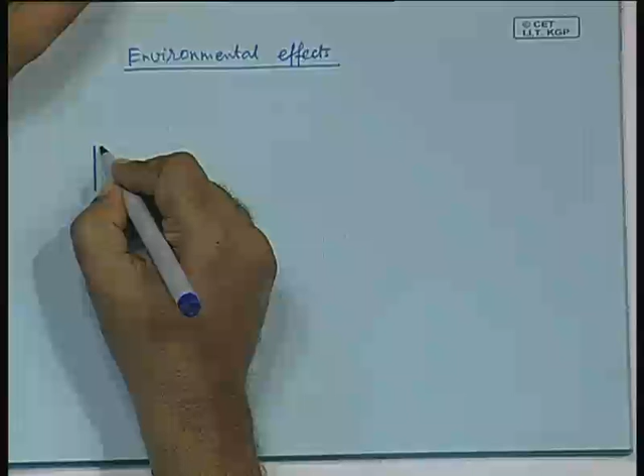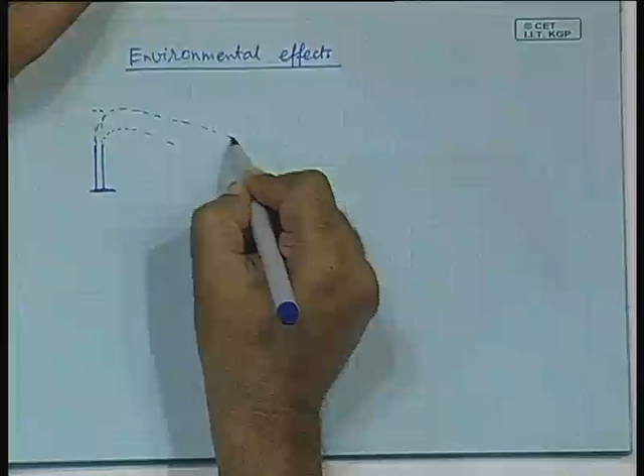So in this case you have some height of the chimney, and above that it rises to some other height. You assume it rises to this height, or it actually goes like this - this is the stack, and if you join these lines, it reaches a point somewhere here. So you can assume the flue gas rose to this height and then was dispersed. Even though these lines are not really straight, it is not unreasonable to assume that.

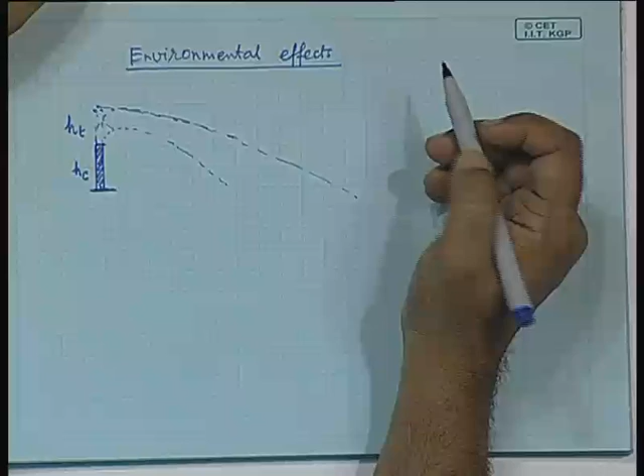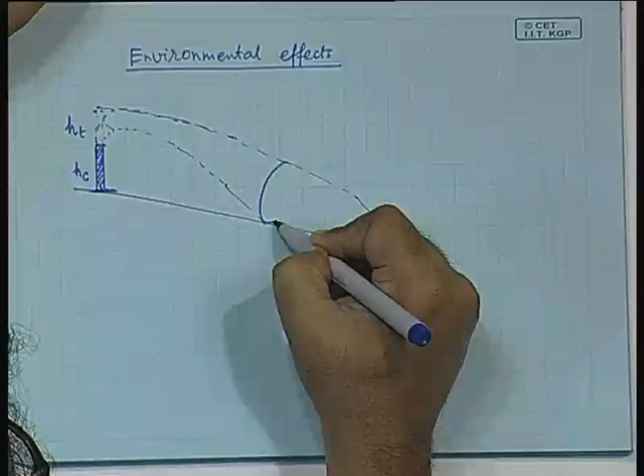Suppose this height is HC, the height of the column, and let this height be HT - the height to which the plume rises. Suppose this is the ground; it touches the ground at some level, and at this point you can assume a circular cross section, where it has touched the ground level and is expanding.

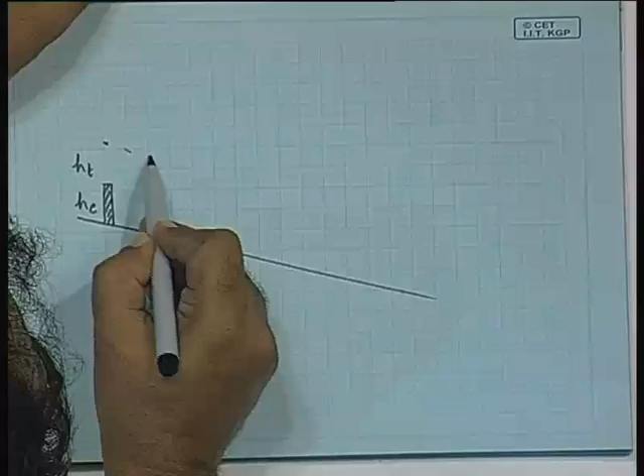Let me draw it separately so the drawing is correct. Suppose this is the ground line, this is the height of the chimney, and this is the height to which it rises - this is HC and this is HT. At some distance it touches the ground, and at that level you can draw a line and assume it to be a circular cross section of this radius.

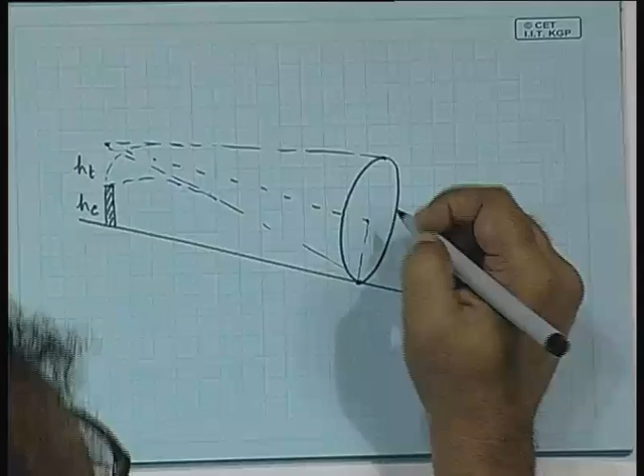So this height is how it is expanding - it is actually going like this, but you extend those lines. So the total height h is HT plus HC, and this radius is also h.

Now the question is, after how much distance will it touch the ground? In general, it has been found that this is of the order of 15h. So things are expressed in terms of h.

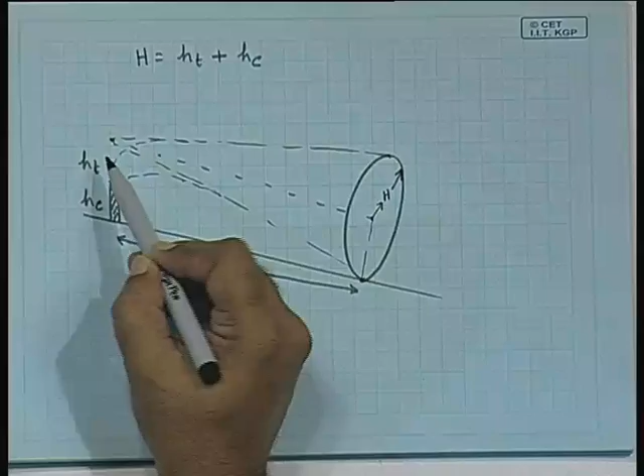You might ask how much should be HT, because if everything is calculated on the basis of the total height, you need to know how much it will rise. That obviously depends on the energy content in the flue gas and all that. So let us see what they are.

So what you have seen: HT is the thermal plume rise, and HC is the stack height.

These issues we will be dealing with are very important. You may have noticed, if you go to Calcutta, there is a Kolaghat thermal power plant. It has 3 stacks that are shorter, and then in a newer stage, far taller stacks. Why? Because it was found that the shorter stacks were causing problems, so they built longer stacks. So these calculations we are doing now are important because you need to bring the pollution level below a certain threshold, and that really depends on the choice of height.

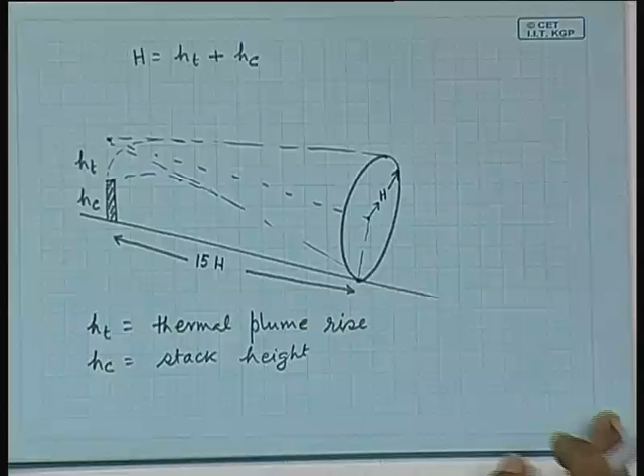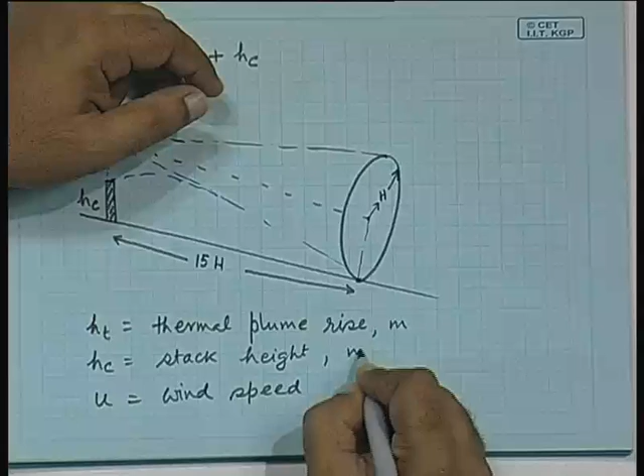So, let u be the wind speed. These are all in meters, and this is in meters per second.

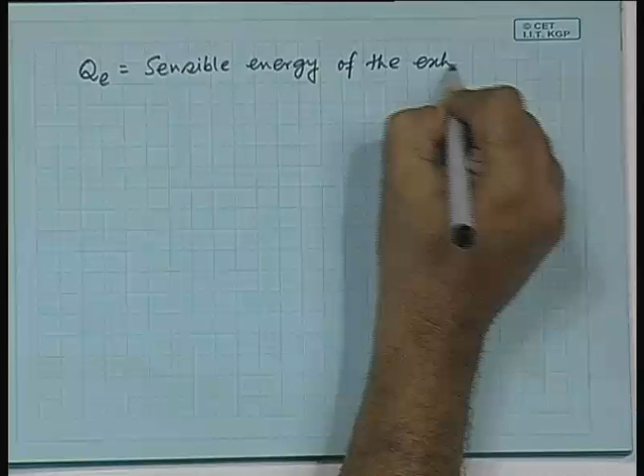We will come back to that. Let qe be the sensible energy, relative to the ambient temperature.

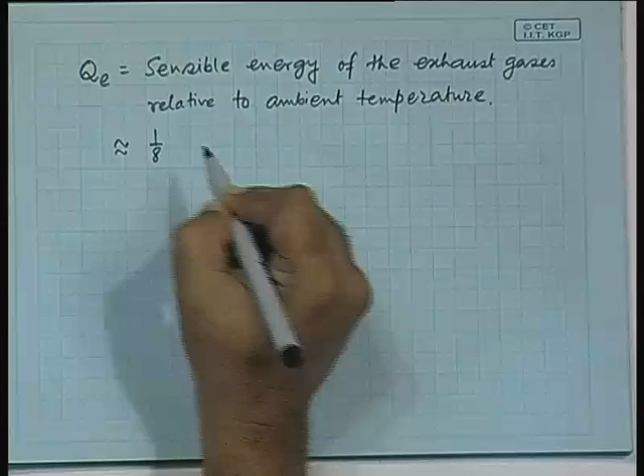Do you have any idea how much the energy content in the flue gas is? In general, a rough estimate is about 1/8 of the electrical power output of the power station. So this is approximately 1/8 of the electrical output.

One way of estimating this is to know the temperature and the volume, and calculate from there. Or, for a rough estimate, you can simply say the power station's generation capability is 210 megawatts, and therefore the energy content will be roughly 1/8 of that.

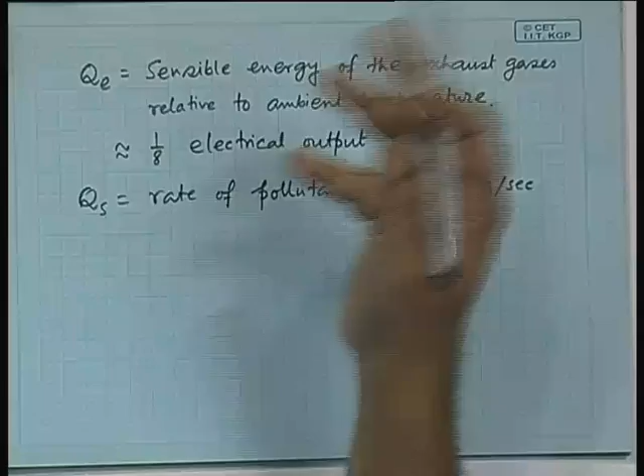Qs is... this is in kg per second. What is this? Suppose you are talking about SOx pollution, then how much SOx is there in the flue gas, in terms of kg per second - that you need to know in order to calculate.

Then the most important thing is to know HT, how much does the plume rise? It cannot really be calculated, because it has to be obtained from empirical figures. People have observed and seen that it follows a certain relation. So normally this figure is something like this.

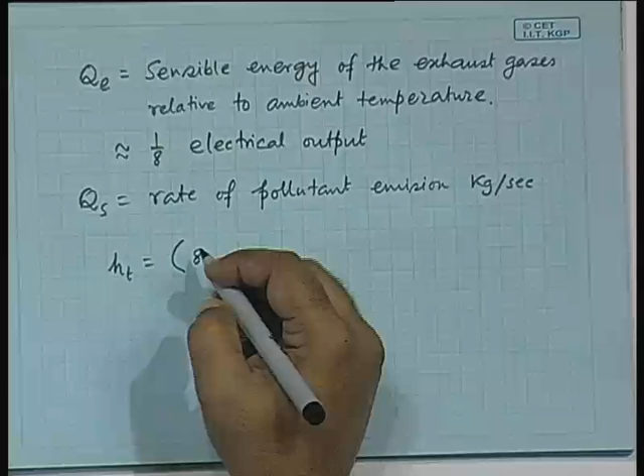It should depend on the energy content to the power 1/4, divided by u. Obviously, it should depend on the stack height, it should depend on the energy content, and it should also depend on the wind speed - inversely proportional to it. The more the wind speed, the less the height, and so on and so forth.

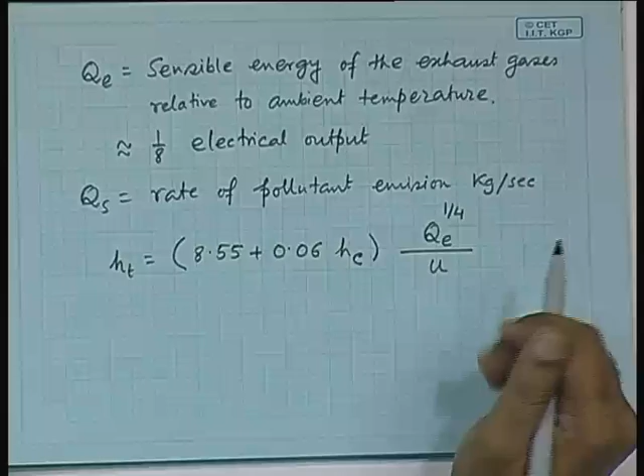So the dependence is more or less intuitively clear, but the exact functional form obtained from empirical studies is something like this, and capital H is equal to HT plus HC.

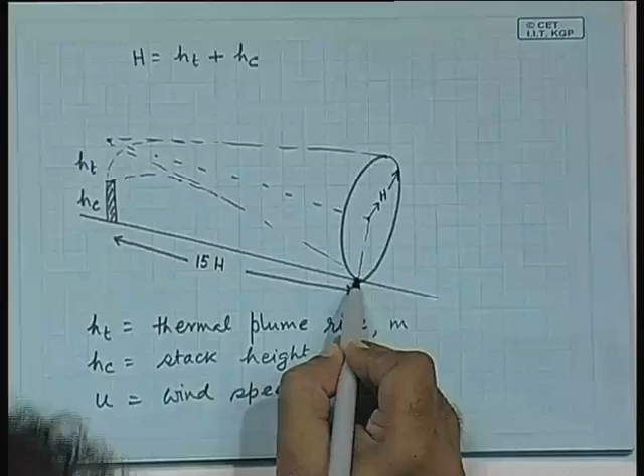Now let us look at this. The plume rises to this height and then expands like a cone, and finally reaches this particular point. So when it reaches this point, what is the volume flow? We are interested in when it touches the ground - that means it has come to this level - and now we are interested in the volume flow rate of the pollutant. So how much should that be?

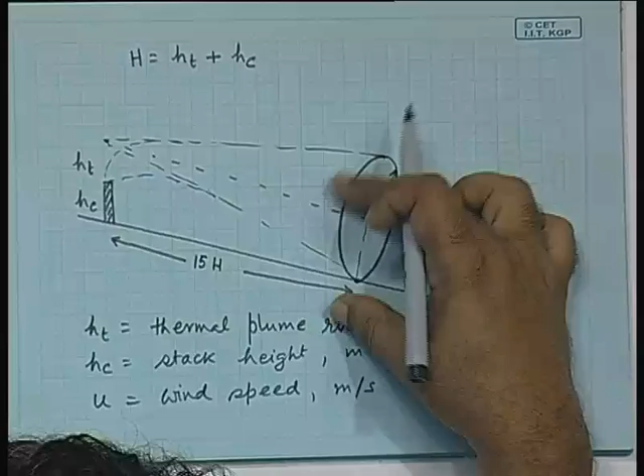It depends on the area, and depends on this flow rate u. So the volume flow rate would be pi H squared u.

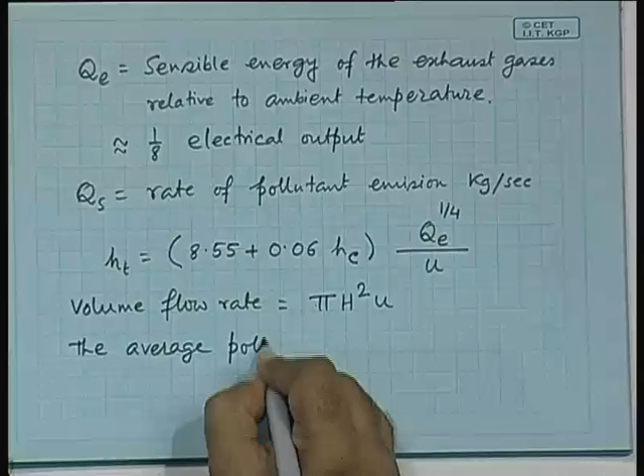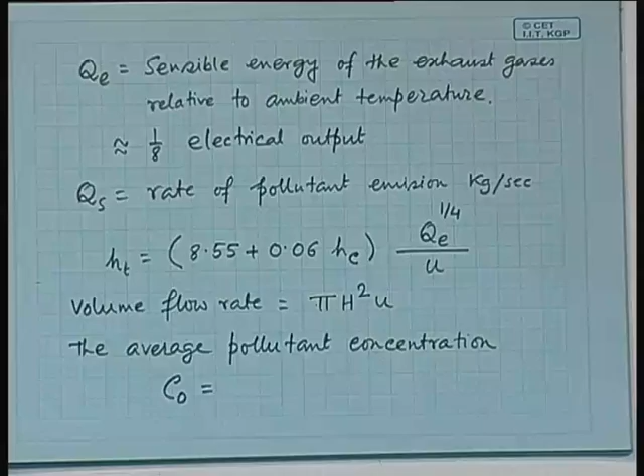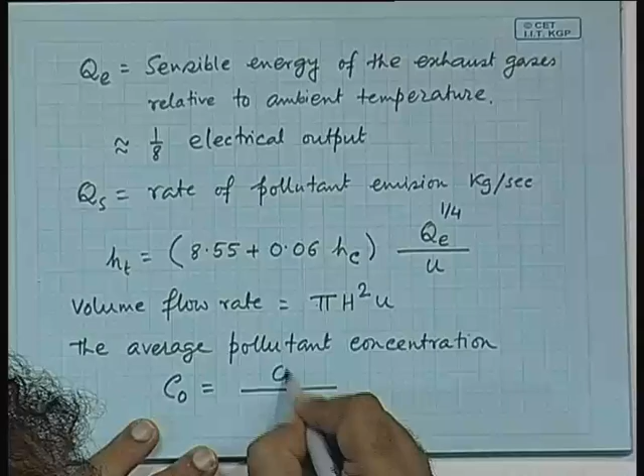Now, the average pollutant concentration in the plume, in this particular plane, would be C0, which should be expressed in terms of the rate of pollutant emission - this amount of pollutant emitted, divided by the total flow rate. So you have Qs divided by pi h squared u.

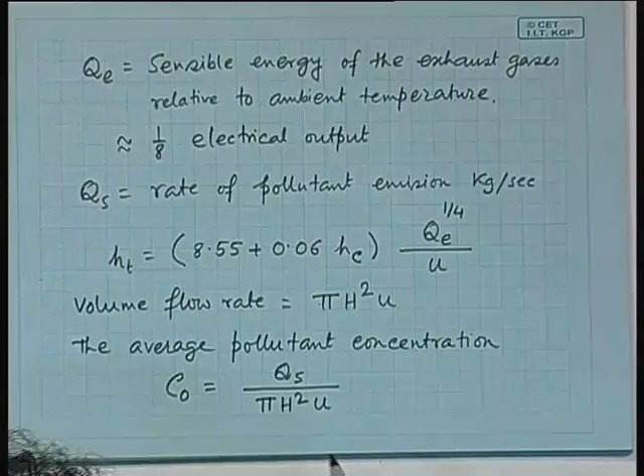So that is a simple affair - you have this expression for the average pollutant concentration. So what are the units? Qs is in kg per second.

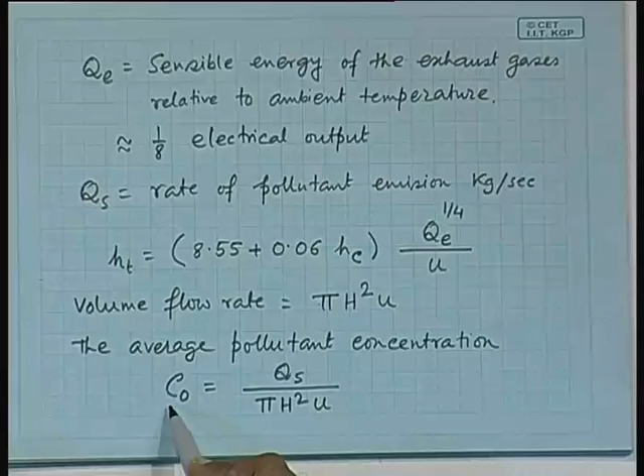This has to be expressed differently, because when talking about pollutant concentration in a fluid, you normally do not talk in terms of kilograms - it has to be very small, tiny trace quantities. If something is in tiny trace quantities, you do not talk about kgs. It has to be expressed as, say, micrograms per meter cubed - that is the unit in which pollution is expressed - whereas this other term was available in kg per second.

Why? Because you knew how much sulfur is in the coal - so many kgs, a fraction of that so many kgs - and the rate at which the coal is consumed, if known, can be expressed in this term. So this term is available, and this other one needs to be expressed in those units.

Can you check whether it will automatically convert into this unit? Check the units - this is available in kg per second. So this should be micrograms times 10 to the power of how much - you just calculate that.

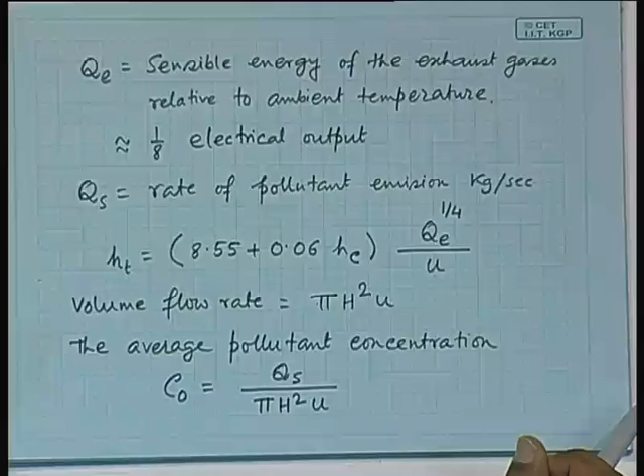The other way to express concentration is ppm, parts per million. Since this is a gas, we ask how much SO2, SO3, SOx is there in a large quantity of air - that's another way of expressing it, and it needs to be available in terms of volume. Remember these units, because if you say there are so many kgs of pollutant in your place, that does not make sense. It is either microgram per meter cube or ppm.

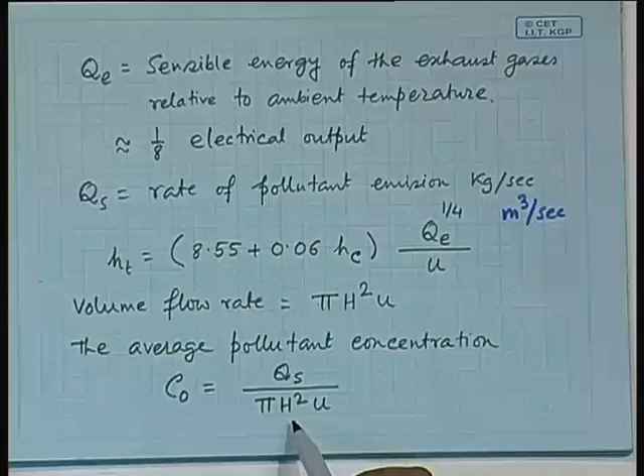If QS is in meter cube per second, it is after all a gas, so it can be expressed in meter cube. If it is in meter cube per second, then it will be expressed in ppm. If it is in kg per second, it will be available in micrograms per meter cube. So we have understood at least this part.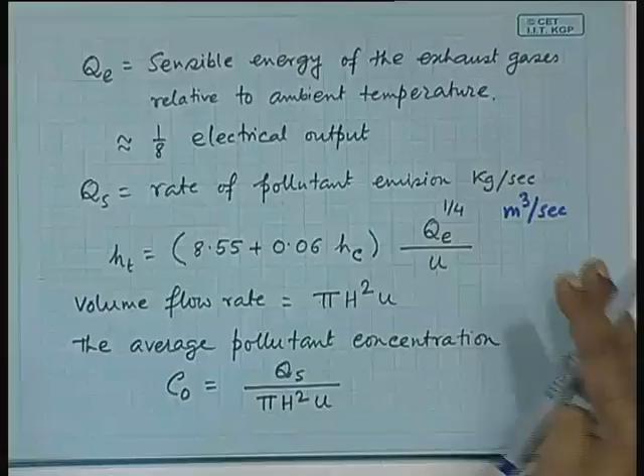Now this is the instantaneous concentration - this much was being emitted, and out of that this much reaches there, but that is instantaneous. The wind is flowing in this direction, this fellow is standing there, so he is sniffing that amount, the maximum amount. But over the year, wind direction changes, so a particular radius around the power plant gets affected at distance 15h. If I ask you to calculate the average level of concentration over the year, assuming more or less uniform directional changes in wind, can you calculate?

It is a radius in which things are reaching, and I want you to calculate the average of that. So you have to assume random wind direction. If it is directional, then obviously it will be skewed in one particular direction, but assume randomness.

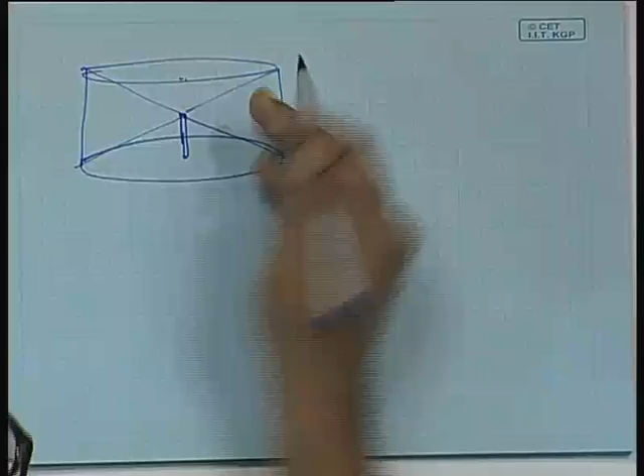Then how will it be? It will be like, if this is the height and this is the thing, you will be talking about a cylindrical area in which it sort of spreads. It will be spreading over this kind of cylindrical area, and we are now interested in how much is the concentration there over the year. How will you calculate that? That will be Qs divided by this area of the cylinder.

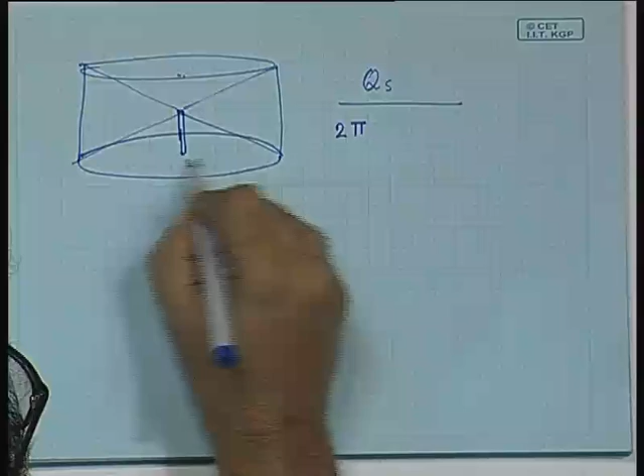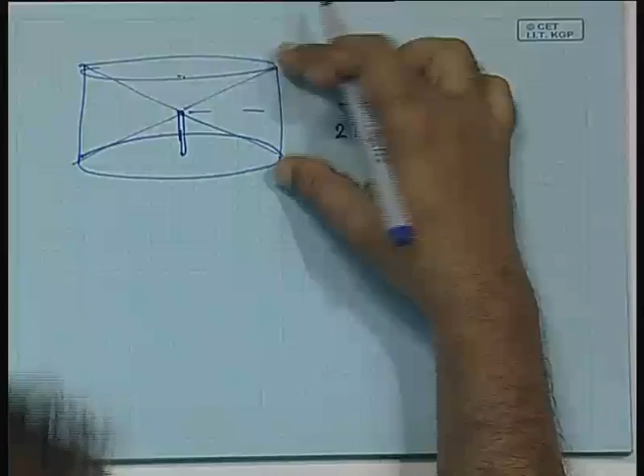So that is twice pi, this radius is 15h, into this height is twice h. This height is h, and the whole thing is twice h. So notice here, this height is h, the whole thing is twice h - so you need to talk about twice h in this case.

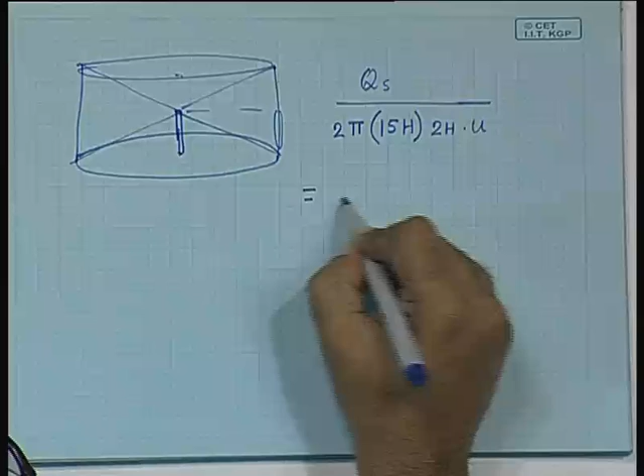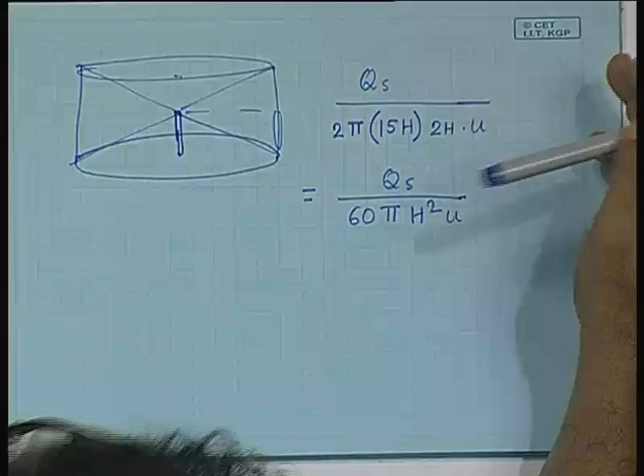So this is equal to Qs divided by 60 pi h square u. Again, depending on in which units Qs is expressed, you will either have it in ppm or in microgram per meter cube.

Let us tackle a simple problem, a practical situation. Suppose there is a 2000 megawatt power station, a very standard size of the super thermal power stations that NTPC is installing these days. The one in Farakka is about 2000 megawatt, the one in Korba is 2000 megawatt, and so on and so forth. Suppose it burns coal with, you just assume this, 2% sulfur.

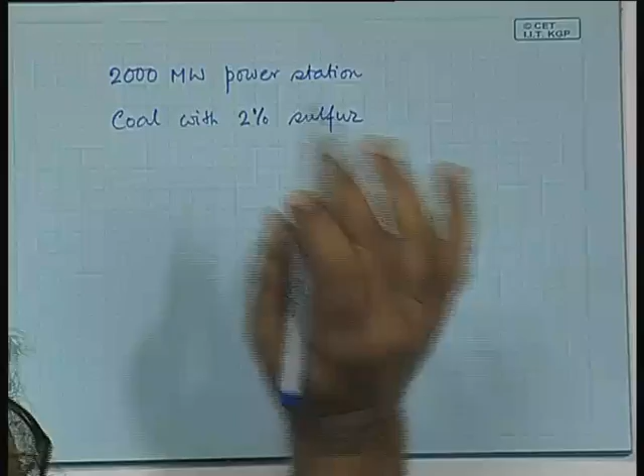That can be known - Indian coal has relatively less, but nevertheless you assume this in order to learn how to calculate. Let the stack height be 200 meters. Let the wind speed be about 7 meters per second.

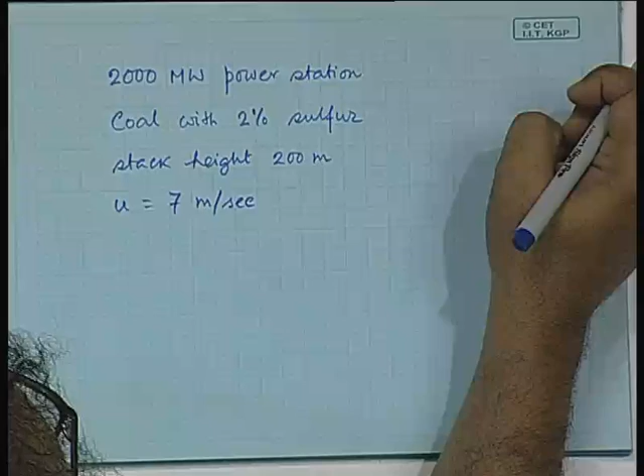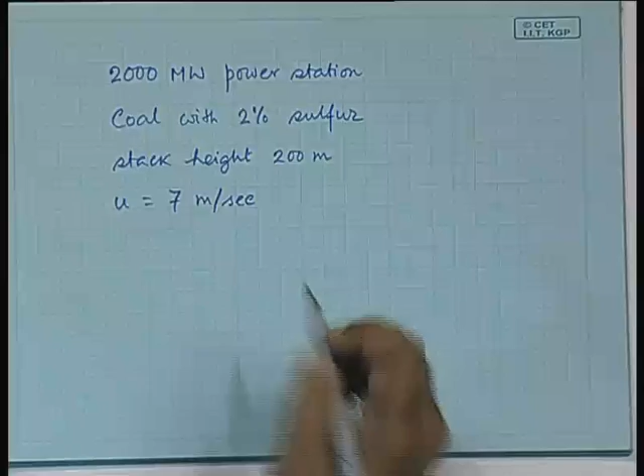All these are very standard values. So is this the average speed throughout the year? No, presently we are trying to calculate it now - at this present moment, this is the speed at which the wind is blowing. If you are to do it over the year, this speed has to be the yearly average wind speed at that particular location. So what other information would you need? The efficiency of the power plant can be assumed with a reasonably good figure, about 38%.

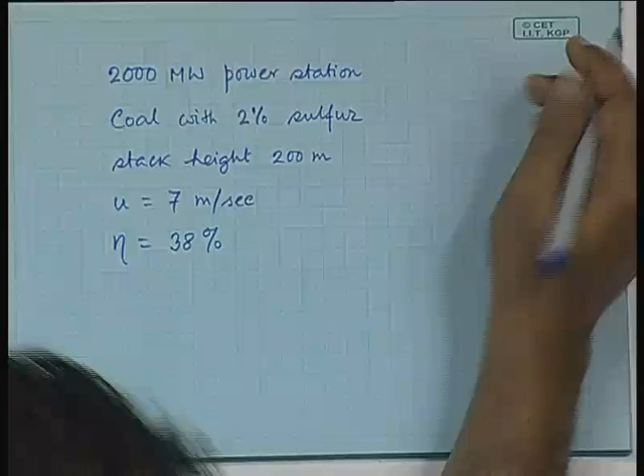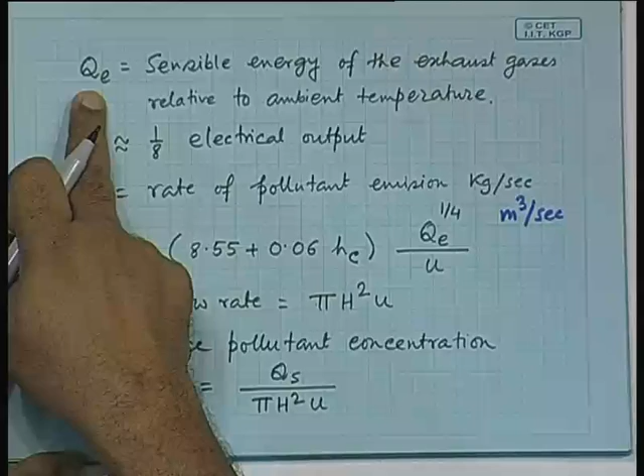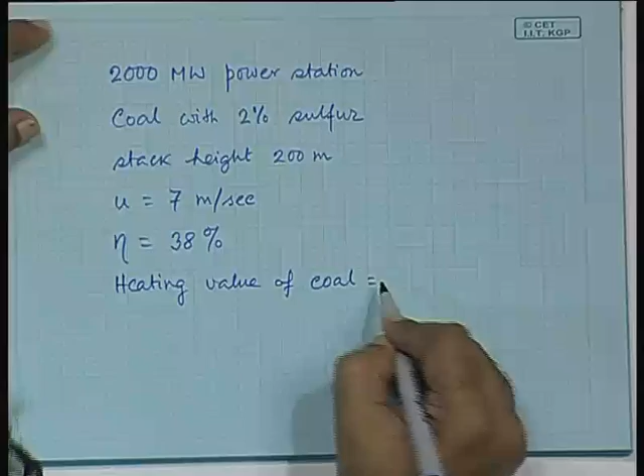You need to know this sensible energy, right? Yes, so in order to calculate this, 1 by 8 is a very rough quantity, as I said - you can always calculate that better. So this needs to be calculated, and for that you need the heating value of the coal, which is 25 into 10 to the power 6 kilojoule per ton.

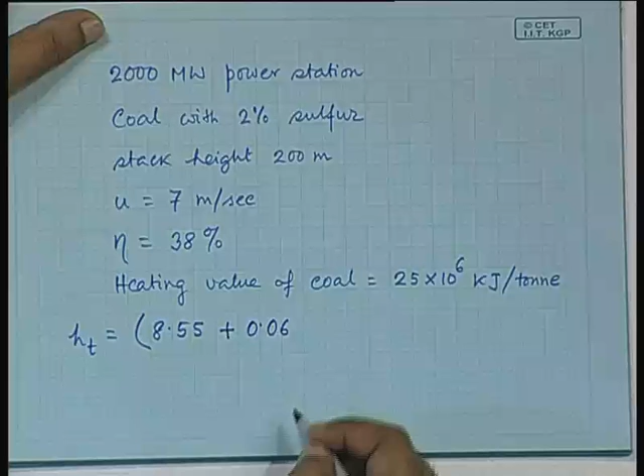Okay, the first thing is to calculate this. HT you need to calculate - how much will the plume rise? That is 8.55 plus 0.06 times, how much is this, 200, right? Times it is QE to the power 1/4 by U.

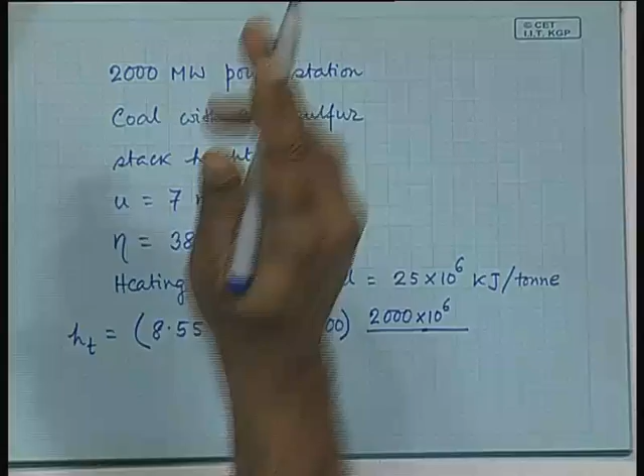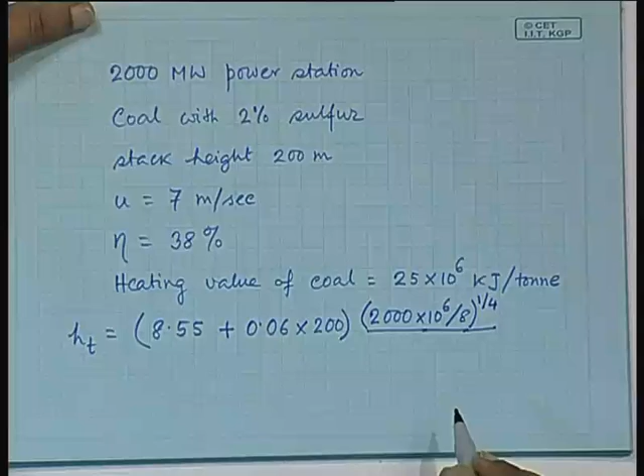So QE, it can be calculated from there. You have total is 2000 megawatts - this is the power generation capability, and approximately therefore the heat content in the flue gas would be 1/8 of that. This has to be to the power 1/4, divided by U. U is 7.

Can you calculate what is this? Do you have a calculator? None of you have it. Yeah, do calculate - when I calculated sometime back, it came to be around 369 meters.

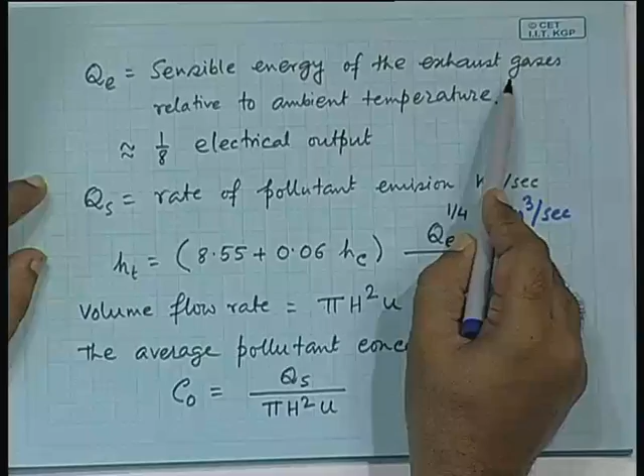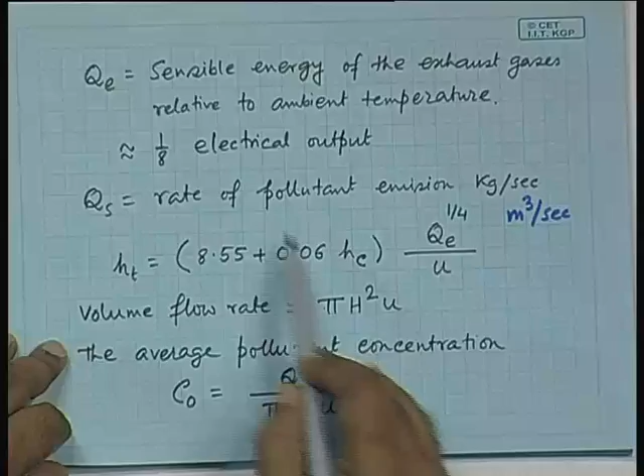No, efficiency at this stage will not come, because the sensible energy of the exhaust gas, that is what we are interested in, is about 1/8 of electrical output. That is what you are using. Electrical output is 2000 megawatt, and that is enough for our purpose now. So we are using this relationship really - we will use the 38% later somewhere else. At least for this, the approximate value suffices.

So the initial stack height is 200, it additionally rises to this much - so the total height is 569. So h is 569 meters. Now you need to calculate QS.

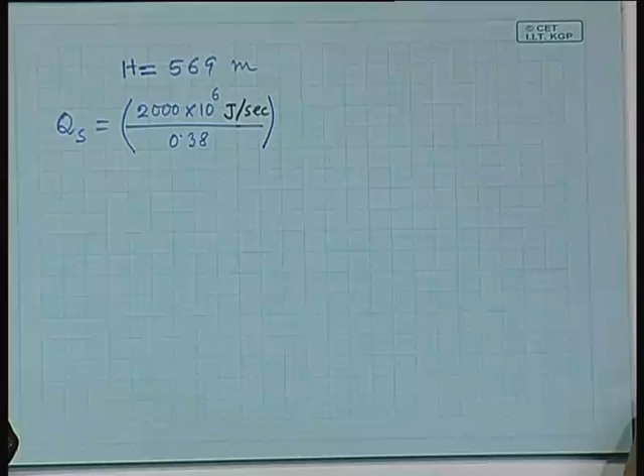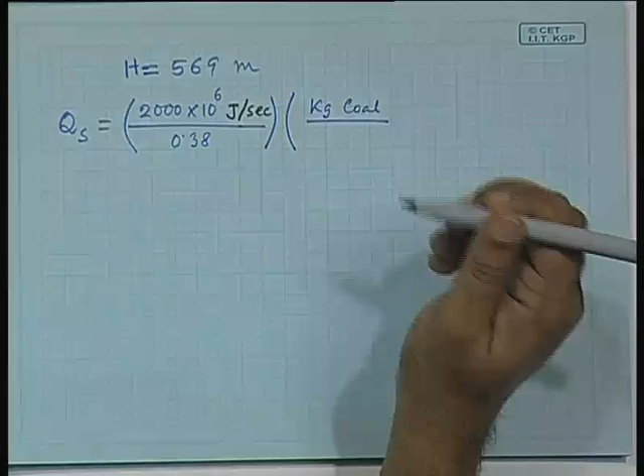This has given you how much heat is generated. Then it has to be multiplied by the kg coal divided by - where did I keep it - yes, the heating value. So heating value is 25 into 10 to the power 6. Now you have joule here.

Right? It was kilojoule per ton, which comes to joule per kg. So you just multiply 10 to the power 3, divide 10 to the power 3, it comes to the same.

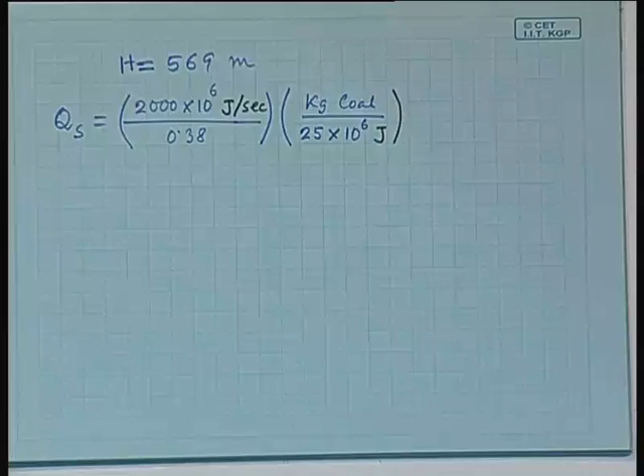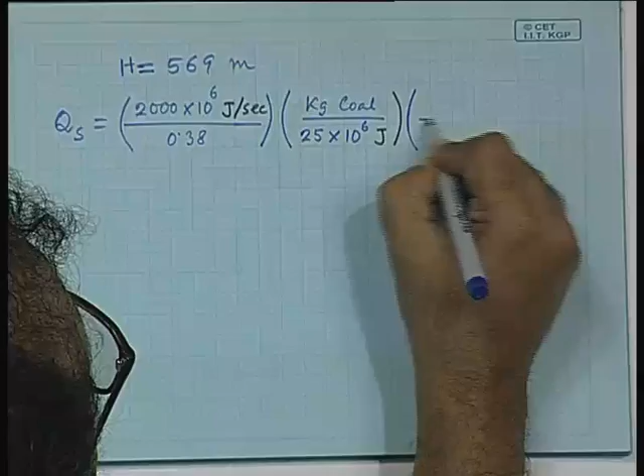Now you need to use how much sulfur is there. How much sulfur is there? 2%, so it should be 0.02. Okay, this is kg per second - sorry, I was writing in black - divided by the kg coal.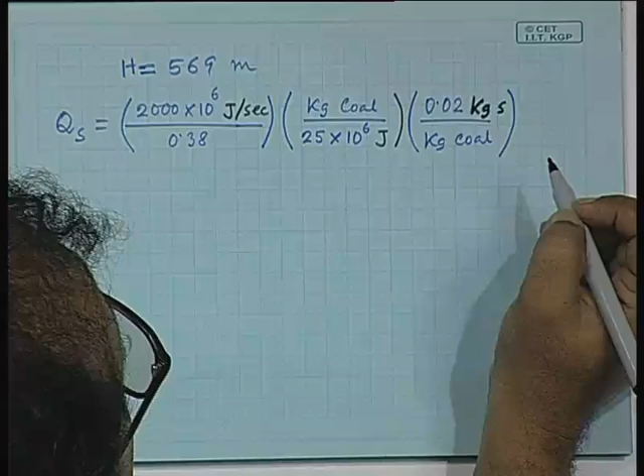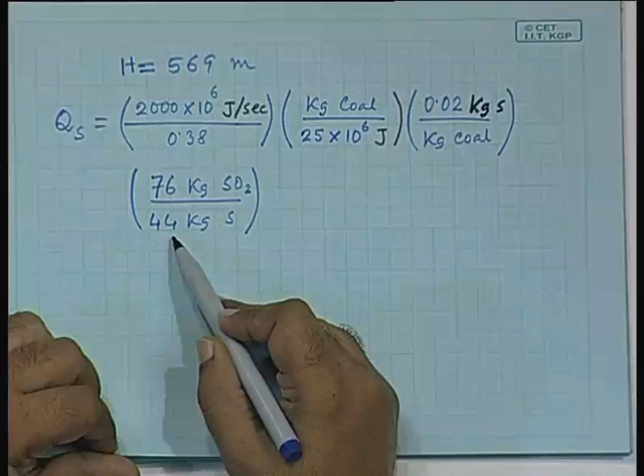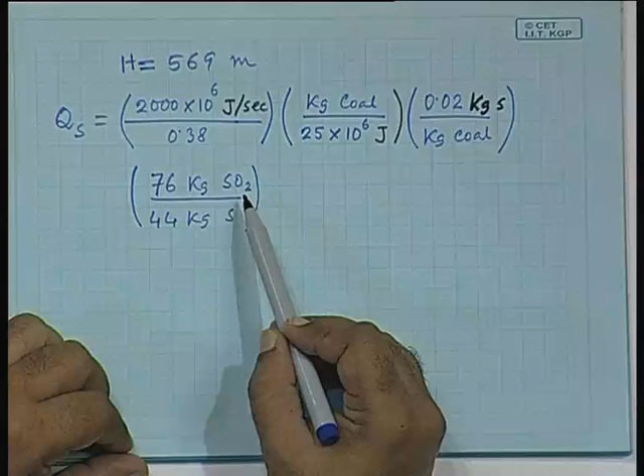Then this is the amount of sulfur that is generated per second. But sulfur is not what you are interested in, you are interested in SO2. So how much sulfur generates how much SO2? Can you tell? You know that amount of chemistry. So, times approximately 76 kg of SO2 by 44... no, by 32 kg of sulfur. S is 32 and... 64 by... oh yeah, then it has to be, like 2 is somewhere, it is about 2.

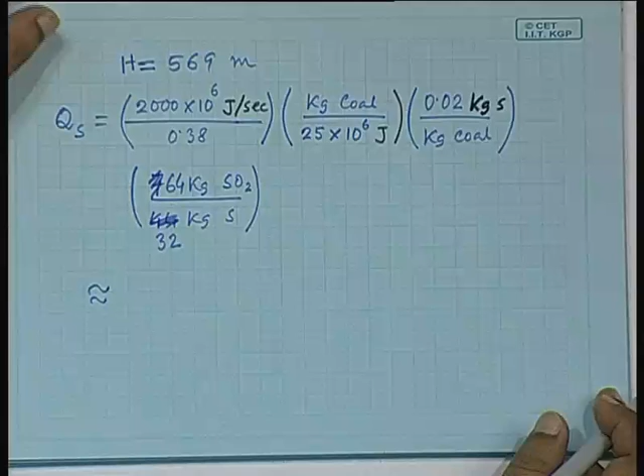So if you calculate this, then what do you get? Essentially this will give you the value - probably it will come to be approximately 7. You calculate it once. So if it is approximately 7 kg per second...

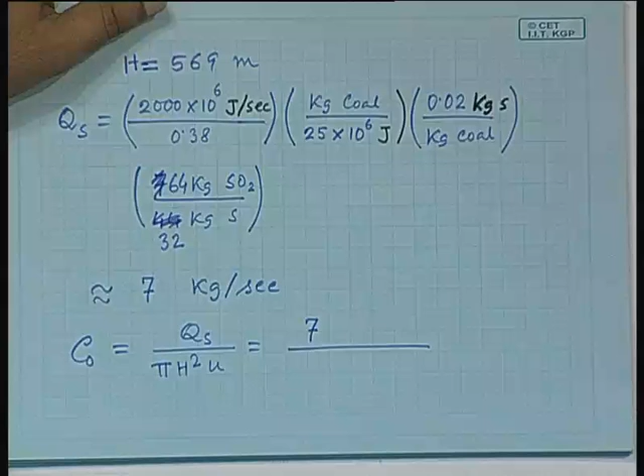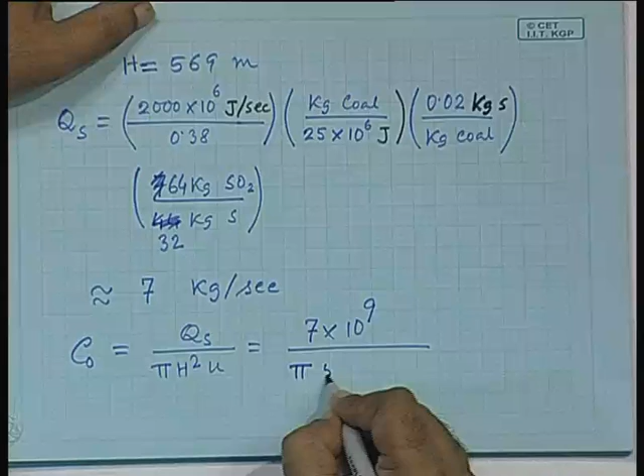Then the next step is to calculate this. So you have C0 equals QS divided by pi h squared u. Any problem? It's pi h squared u. This is again 7 - we are talking about microgram, so it will have to be multiplied by... divided by pi h is 569 squared into 7 meters per second. So how much does it come to be? Approximately you can say 1000.

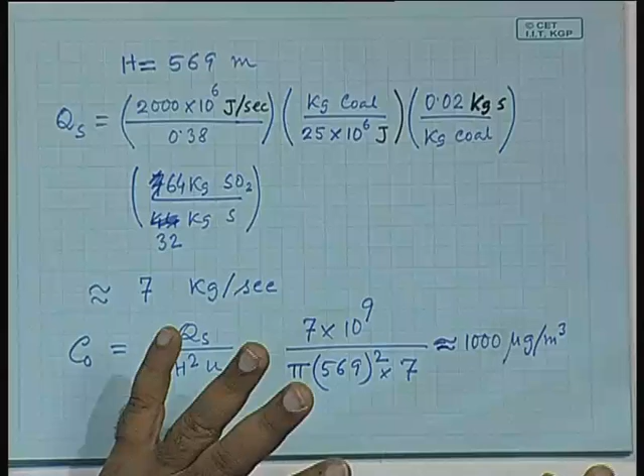So this is how the calculation is really done. Do you understand that if the pollutant substance is something else - say NOx, say suspended particulate matter, say in case of any other industry some other thing is coming out of the flue gas - then you can do it the same way, the calculation. Because engineers need to talk in terms of numbers and amounts, you should be able to calculate the amount of pollution that reaches the ground at a certain level.

But as I told you, this is spot pollution, the pollution that reaches a spot. But what about the pollution that reaches globally? The amount of carbon dioxide that is generated and released globally is a major problem because of the greenhouse effect, which you are feeling, right. Now we are in the middle of a greenhouse phenomenon, the weather is changing. Every year Cherrapunji and Mawsynram used to receive huge amounts of rainfall - this year it is desert. Every year Rajasthan is a desert - this year it is a flood. So you can see the effects we are facing, and all these are because of the increased release of carbon dioxide, methane and other greenhouse gases into the atmosphere.

So coal based power generation is not all that a benign source. We need to understand that. It is true, the amount of carbon dioxide that is generated can be at least partially reversed if we plant as many trees, because trees absorb carbon dioxide and release oxygen - it has the opposite effect. But the rate at which this is done, what has actually happened?

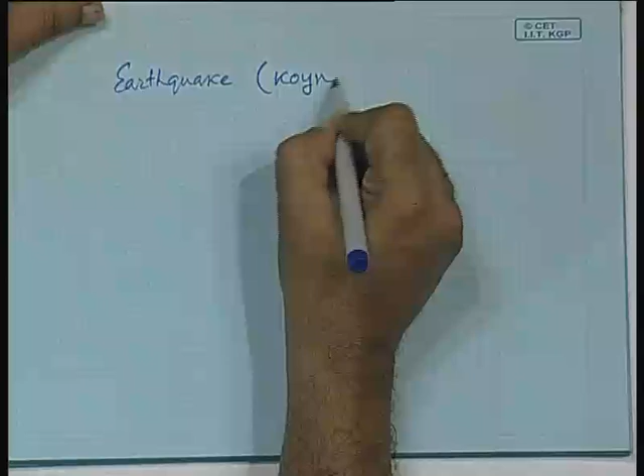For example, there has been a major earthquake at the Koyna Dam in 1967. The dam did not break, but there were cracks which had to be repaired with a lot of expenditure.

But if it does break, that means a dam failure, which is a major devastation. Such a thing happened at one dam in Gujarat called Machhu Dam, in 1979. That wiped off a complete village and caused devastation in the downside plains.

So remember, this happens if you have a very big dam in a place where there is some possibility of seismic activity. But it is also true that there are many other dams that are completely aseismic. For example, in this part, Maithon, Panchet and these dams have not experienced any seismic activity.

The other problem is reservoir capacity. Normally it is said that a reservoir or hydroelectric power plant lasts for 100 years, while a thermal power plant lasts for about 40 to 50 years, not more. Naturally, the effectiveness of the investment is much more in case of the hydel power plant.

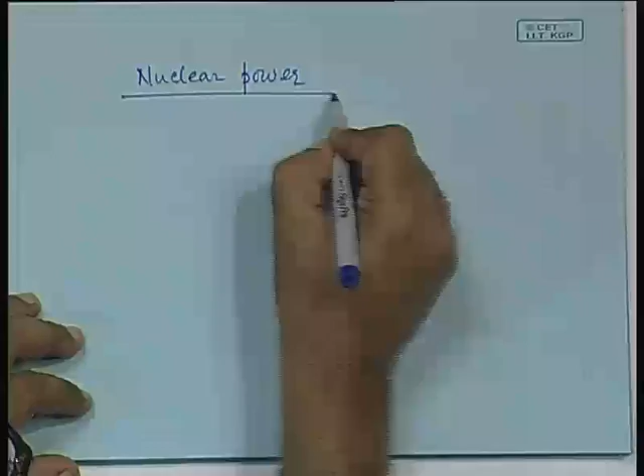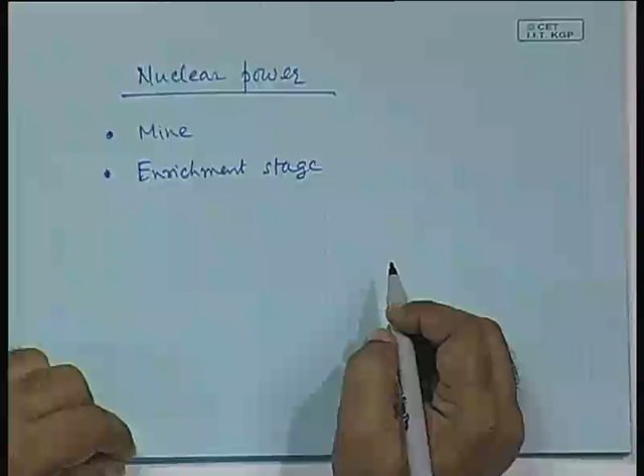In nuclear power, there are a few stages. Remember, the thing that you are handling is radioactive. At the same time, it is true that this radioactivity was there in nature, in that place. But now you are concentrating it, making it much more radioactive, much more dangerous. So it starts, number one, from the mine. Then the enrichment stage. Then the power plant. Then you have to talk about the nuclear waste.

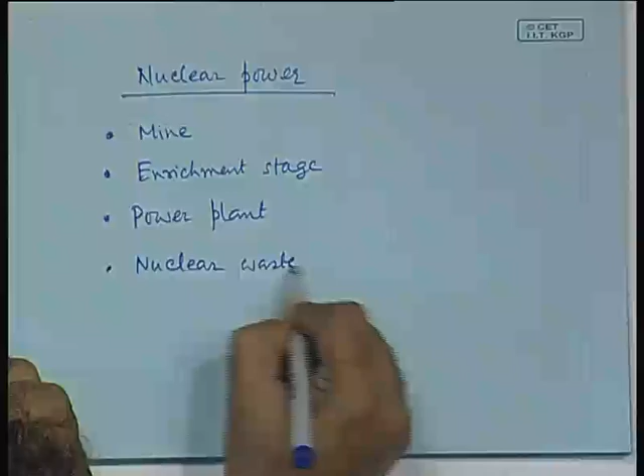In the mine, for example, in Jharkhand there is a mine in Jaduguda, and unless proper precautions are taken, the miners or the people associated with handling that ore - mostly tribals who do not know the nature of this ore - are affected very severely, and this has been found in the Jaduguda mine. A whole area has been affected, and there has been a very high increase in disabled children being born there, people with all sorts of deformities, congenital deformities. So the mine is one area where there can be pollution unless the people who handle it are careful enough.

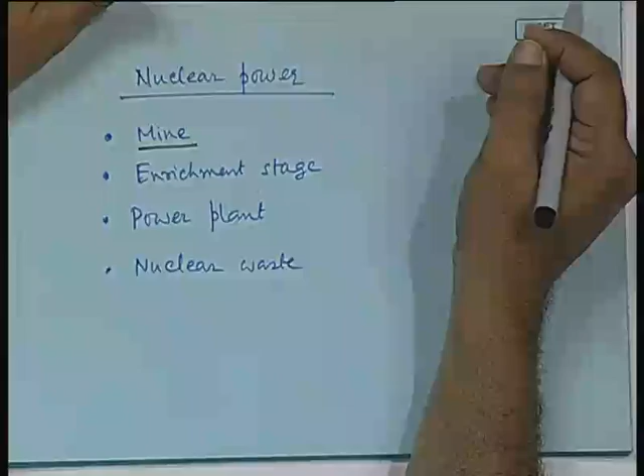And in India, the problem is that people can get away without being careful, and therefore they are not careful.

The enrichment stage happens in some specific plants. So the ore has to be transported to that place, and since it is a huge amount of mainly clay material, that transportation happens without much precaution. That is another problem - proper precaution has to be taken to contain that material to the enrichment site. Enrichment means you enrich it into uranium-238, uranium-235, and the rest of the material is thrown away. Now, that rest of the material also contains radioactivity, so its disposal is a problem.

Now come to the power plant stage. Many people point out that in modern power plants, the chances of accidents are very low. And as we have seen when talking about the different types of nuclear power plants, the one with the boiling water reactor is somewhat environmentally problematic, because the same water that goes to the core of the nuclear power plant also goes to the turbine, the condenser, and so on. So the whole place becomes radioactive, which is obviously not so environmentally benign.